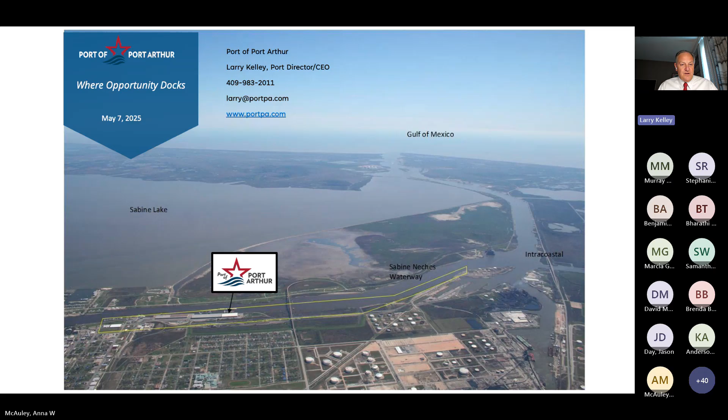So if you don't mind, next slide—that's probably enough of just seeing where we're at. Probably a few people on the call have been through Port Arthur, certainly known for the food and a number of athletes and entertainers that have come out of there. But just real quick, as a public port entity, we may be an odd bird on the call.

We all pursued a very similar grant program. We're a break bulk port. While we do handle some containers, our focus is largely cargo that is sized and fit and placed in a ship and removed. The commodities you see on the right—we handle eucalyptus pulp and other forms of pulp that go into making products you know and enjoy on your store shelves, like Viva, Charmin, Bounty, Cottonelle, Kleenex. Our waterway probably handles more of that fiber between ourselves and Port of Beaumont than any other region or waterway in the nation.

The waterway is also known for being the third highest tonnage on liquid energy exports and the like. Some of the other commodities we handle are aluminum, dimensional building products—2x4s, 2x12s and such. We figured we handled enough last year to build about 15,000 homes in Texas.

One of the things we're very proud of is we're one of 3 designated strategic seaports in Texas: Corpus Christi, Port of Beaumont, and ourselves. Combined with Port of Beaumont, they handle more than we do, but collectively we handle more military cargo than any other commercial ports or commercial waterways in the nation. So very happy to do that.

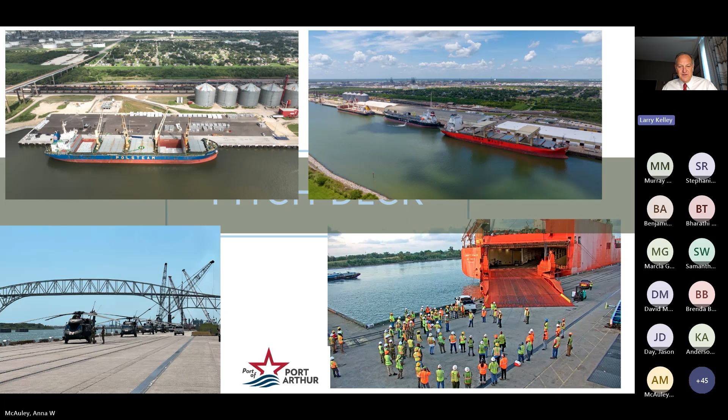Next slide, please. We have a pretty robust capital expansion plan. Berths 5 and 6 constitute most of it, well over $110 million in investment for a small town and a relatively small port—that's been a big project. We're out of marine construction for a little while; we're doing a lot of backlands development, laydown yards, and we do have a building replacement. A big component of why we're here is local job creation and economic development, which leads us to the grant application. In the work we do, we can put probably more people to work with a stabilized laydown area than I can with a building, which leads us to the next slide.

That was kind of an eye test. What brings us here today is the 2022 RAISE grant application. For those of you who have participated in the USDOT discretionary grant programs, I go back to submitting in the very first round, if it was 2008 or I think '09. We were sent back to the dugout—we were 0 for 9 before we got our first grant. That was in '18.

Not very successful. There's not a lot of quit in us, or I'm not smart enough to give up, but we applied through all the various programs.

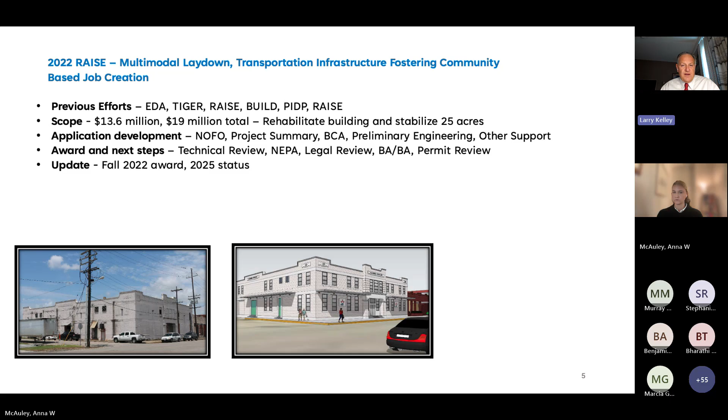We do have some concerns of increased cost of construction of what's happened since 22, but Anna, I will pause there if that's okay. All right.

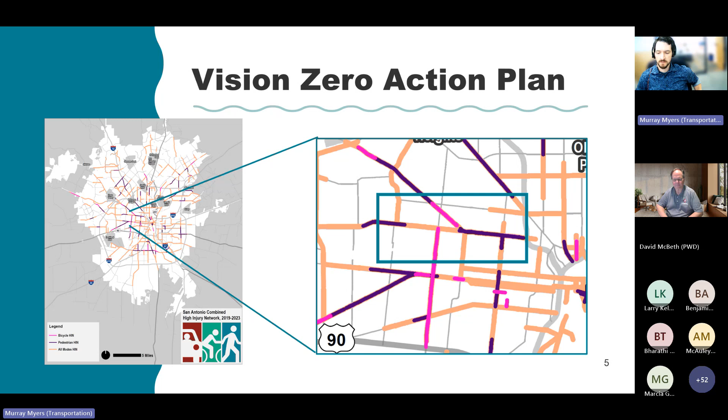And the orange-yellow is all modes, meaning it's dangerous for vehicles, motorcycles, pedestrians, and cyclists. In terms of our federal grant awards, David will talk more about the RAISE planning grant in a second. We were also awarded the Safe Streets for All grant for our Quick Builds program last year - identifying, demonstrating, and evaluating low-cost, high-impact safety countermeasures on the city's high injury network, with the goal of delivering these projects at one-fifth of the cost and one-seventh of the time.

That program includes identifying 5 pilots, implementing those pilots, monitoring them for 6 months, and then evaluating how we continue the program long term.

In 2022, we were awarded the Safe Streets for All grant for Zarzamora, which included 8 mid-block crosswalks, pedestrian hybrid beacons, refuge islands, and vegetation, along with safety campaigns for 10 of our high injury network corridors. So in each of these, you can see how the city has used data to drive each of our projects. We're a very data-driven organization in all that we do - not just in transportation, but also public works and across the organization in our 40+ departments.

So with that, I'll pass it to David.

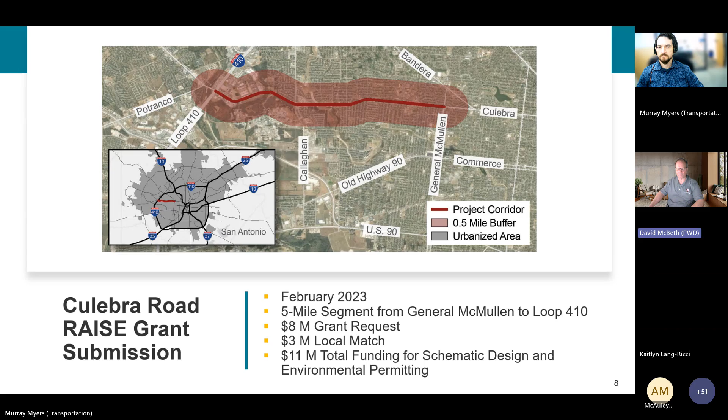So we put in an $8 million grant request, and we were going to match $3 million with that from our bond project - that was a 2022 bond for $11 million total funding for this. This was to do schematic design and environmental permitting for the entire corridor, which gives us positioning to go after future grants for design and construction.

And that shows the feds that we've made a real commitment to this corridor. We did the transportation study, we've got $15 million invested already, starting some improvements in the corridor. So we're very invested in the corridor with the current bond program. Next slide.

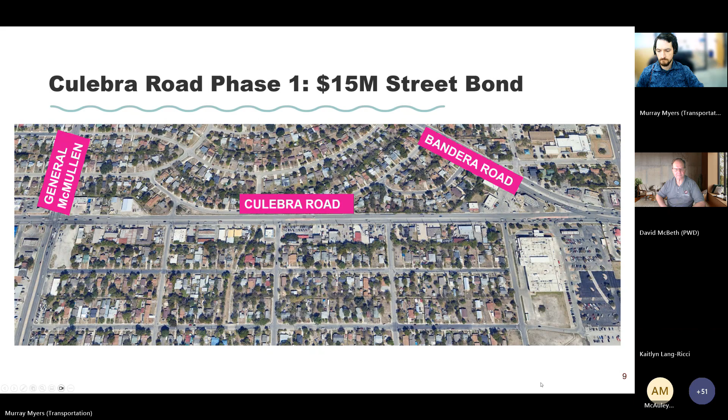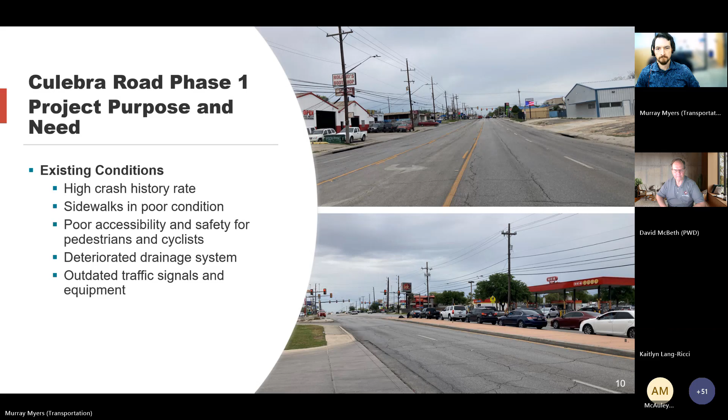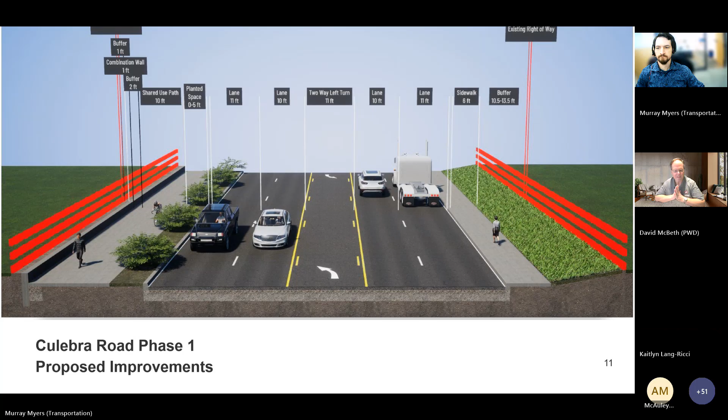So next slide. With the RAISE grant, how were we successful? Like I mentioned before, we had this previous transportation study, and that helped with project readiness. We had already engaged the public on it and gotten very good stakeholder engagement. We also invested in the 2022 bond program with that $18 million, 15 of which we used for a construction project, and $3 million we reserved for the local match when we applied for the grant.

We were able to successfully get a lot of project support from the stakeholders and partners engaged when we did that transportation study, so we had a lot of community support for the project. On the merit criteria, I think we scored really well when we submitted for the RAISE grant - again, the safety issue with high crash history, we were really aimed at reducing pedestrian, vehicular and bicycle crashes in the corridor, which are very high for San Antonio in this corridor.

Sustainability is always a merit criteria, and this provided an opportunity for us to do some sustainability work with landscaping, trees, and materials used for construction. Quality of life - again, just being able to improve expanded transportation access for an area that is low income, but also opportunities for economics for this historically disadvantaged area of the city.

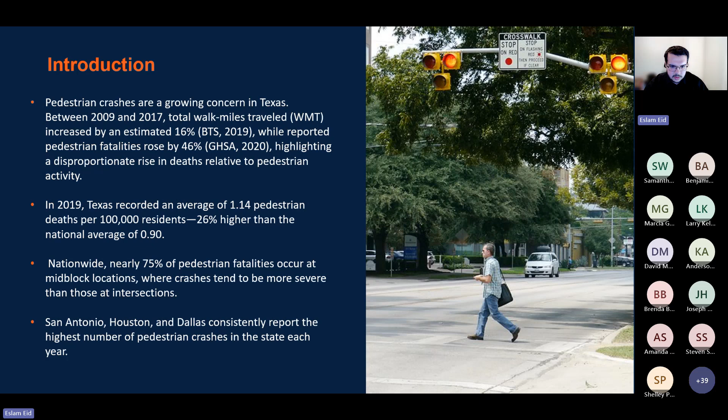In 2019, Texas recorded an average of 1.14 pedestrian deaths per 100,000 residents, which is 26% higher than the national average of 0.9. Nationwide, 75% of pedestrian fatalities occur at mid-block locations, and these crashes tend to be more severe because these are areas where pedestrians are not expected to be. San Antonio, Houston, and Dallas are our main focus, as they report the highest number of pedestrian crashes in the state every year.

There's a need to identify high-risk locations in San Antonio, Houston, and Dallas, and to start integrating interventions. There's also a need to improve understanding of promising crash mitigation treatments in Texas, and these high-risk mid-block crossings need to be evaluated based on detailed crossing characteristics. We want to see how pedestrians use the mid-block, where they're crossing to and from, and what interests them into taking that risk.

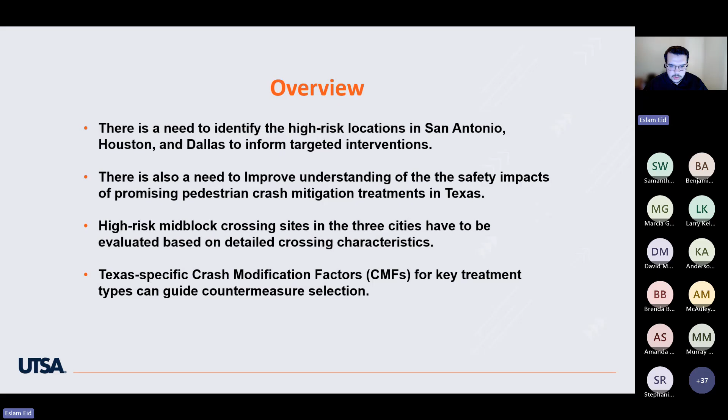Texas-specific crash modification factors are to be developed. That is our main goal, to develop CMFs specifically for Texas. We want to develop a system for TxDOT to help identify high-risk pedestrian mid-block crossings and select the most effective treatments for each location.

Our assessment methodology focused on crashes from 2003 to 2023 using crash data for Dallas, Houston, and San Antonio. We did GIS-based filtering to exclude crashes at intersections or intersection-related crashes, since there are multiple types and we're only interested in mid-block crashes. We look at each crash and create a 5-kilometer buffer zone around it, then examine overlap between crashes to find hotspots.

We also filtered the relevant roadways using TxDOT's roadway data map and inventory. For data processing, we found some crashes reported in places not close to the roadway, so we did some snapping to ensure all crashes are in the correct locations. Finally, we identified pedestrian crash hotspots and validated them using hexagon-based spatial analysis in ArcGIS.

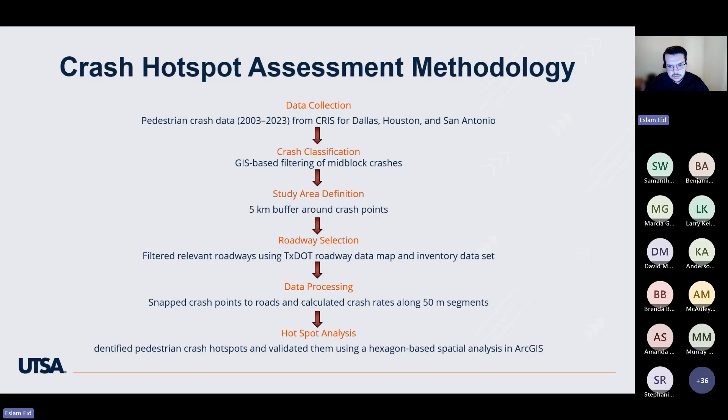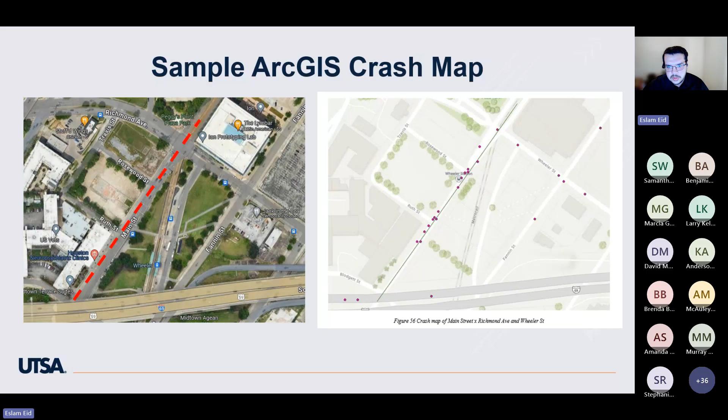Here's a sample ArcGIS crash map, showing one road in Houston—Main Street crossing Richmond Avenue. The purple dots represent pedestrian crashes along that line.

Some key crash data facts we obtained for our hotspots: we identified a total of 30 hotspots, the top 10 for each of the three cities. At 86% of all hotspots, there was a bus stop present, either on the near side, far side, or both. The highest crash days of the week were Fridays and Saturdays, with the top time ranges being afternoon and night. The most contributing factors were pedestrians failing to yield, and second, intoxicated pedestrians and intoxicated drivers.

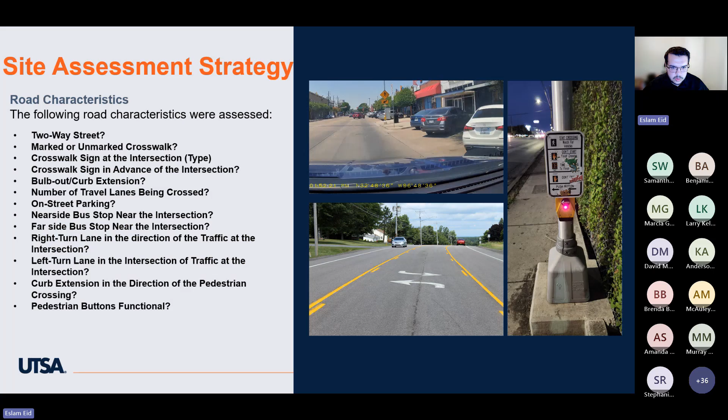Moving on to site assessment strategy, we're essentially asking what reasons would cause a pedestrian to cross at mid-block instead of at an intersection. We look at things like whether pedestrian buttons are functional at the intersection, whether a median encourages pedestrians to use it as a refuge even when not designated for that purpose, and whether there are bulb-outs, curb extensions, near-side or far-side bus stops, and turning lanes. We're also interested in illumination—whether it exists and is functional.

The land use, specific land use for these areas, and we look at things such as marking quality, road characteristics, if there's a vertical slope or horizontal slopes on the road, any vegetation that might be blocking the signages for the drivers.

We also look at the pedestrian and driver interactions, such as how many drivers drove through the crosswalk without attempting to yield. Do drivers generally yield to pedestrians? Does group size affect how drivers would yield to pedestrians? Are there physical disability persons crossing the street, which might give it more priority? Number of pedestrians attempting to cross the intersection.

We also looked at number of pedestrians that would use the intersection as opposed to jaywalking. And we also focused a lot on bus stop activity and usage, because we noticed that it is one of the main reasons why pedestrians would cross from one side to the other.

For our recording method, we simply used dash cams in our cars, and we posted up at these 30 locations for an hour to two hours at the highest crash durations, which were afternoon and night. We focused our study at these durations and recorded some footage.

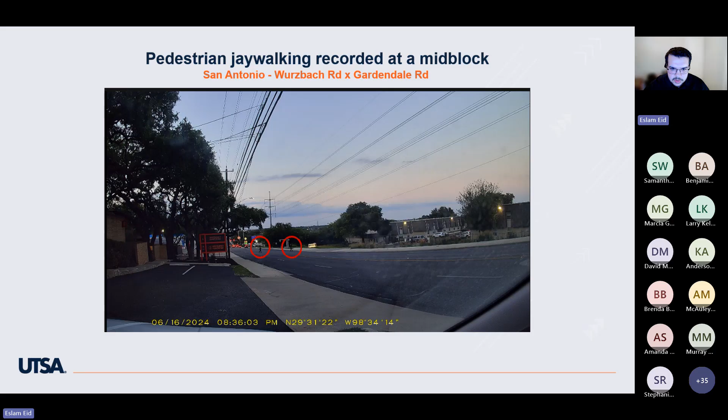And this road has a vertical slope as well, which could contribute to some crashes for pedestrians not being able to see the car, maybe at the top of the road. It can affect as well how long it takes the drivers to stop for the pedestrian.

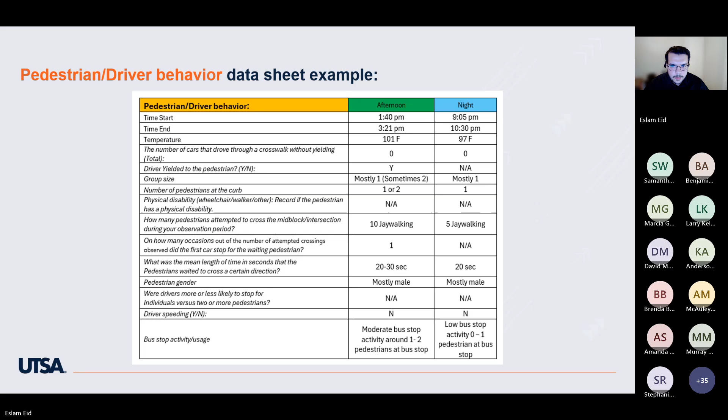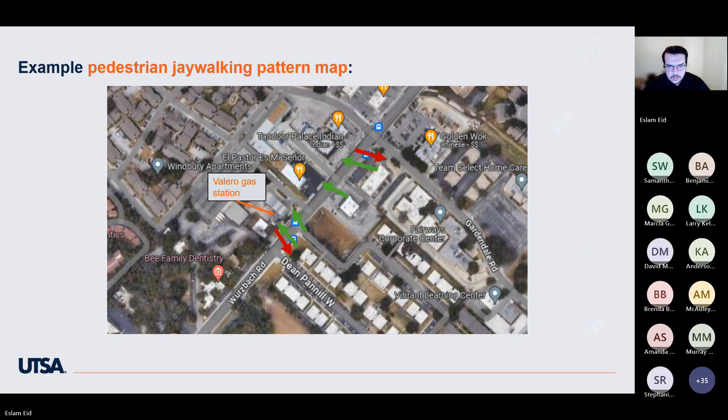And as well, down the road, we can see a lot of crossings occurred between the restaurants and the opposite side of the road.

Our observed pedestrian destinations: more than a third of all crossings in the 30 hotspots were to and from gas stations, usually due to multiple interests there, like food trucks and other activities. We saw a lot of activity to and from gas stations and residential areas, followed by shopping plazas at 6 out of 30 hotspot locations.

And then there's a tie between medical centers and HEB Plus slash HEB.

As a conclusion, jaywalking behavior is widespread. We've seen it mostly focused when there's a big distance between one intersection and the other, or it's inconveniently located. Pedestrians choose to take the shortest path to their destination, and often use medians or turning lanes as refuge, perceiving it as a safer alternative to shield themselves from oncoming traffic.

This behavior was most common near bus stops, commercial establishments, and gas stations.

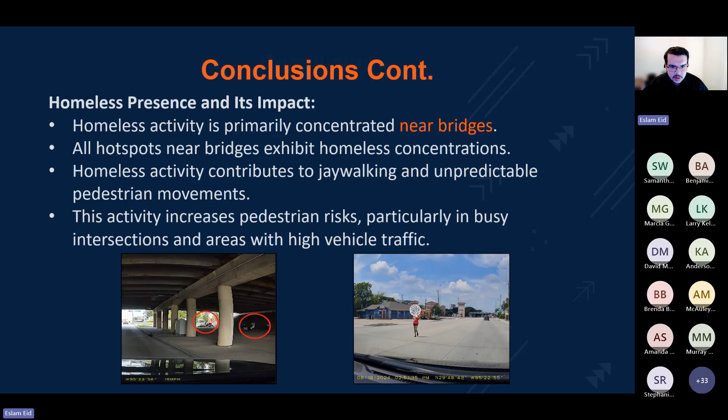Another thing we noted is high homeless activity, primarily concentrated near bridges, which can virtually increase pedestrian volume in these areas. Homeless activity contributes to jaywalking and unpredictable pedestrian movement, which increases pedestrian risks, particularly in busy intersections and areas with high vehicle traffic.

Drivers were seen frequently failing to yield to pedestrians, even at treated mid-blocks. But we also noted something interesting: in places where jaywalking is very prevalent and there's a high volume of pedestrian jaywalking, there's some sort of jaywalking culture, and drivers anticipate pedestrians crossing in these areas. In that case we saw a lot of people actually yielding to pedestrians crossing.

Most drivers are seen to comply with speed limits, but speeding was seen more prevalent at nighttime.

Poor lighting was a main concern as well. There's a lack of street lights in mid-block locations, as of course it's not expected for pedestrians to cross there. Low pedestrian activity at night in general, but there's still high activity between convenience stores, gas stations, and bus stops throughout the night.

To repeat again, most reported crash factors include pedestrian fail to yield, intoxication, and also failure to yield to pedestrians, which suggests that even at treated mid-blocks, there were some cases where the driver fails to yield to pedestrian as well. Other factors are driver inattention.

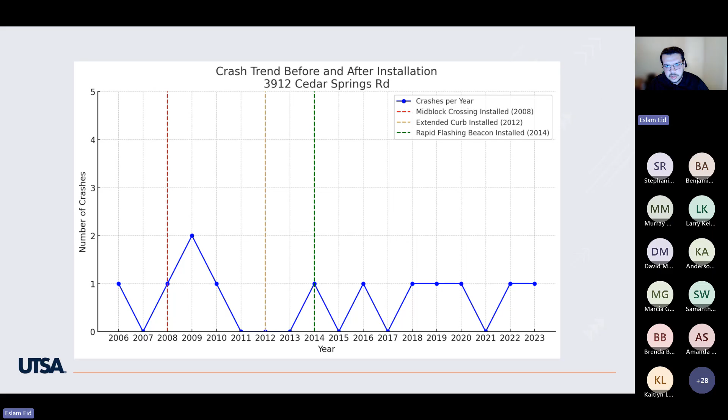At first glance, we can notice that it hasn't reduced crashes since 2014, but we suspect there is an increase in pedestrian volume in this area. It's a very lively area with a lot of bars, restaurants, and so on. Analytical data such as streetlight transportation analytics can help us determine if there was a high increase in pedestrian activity in this area over the years, indicating a positive effect from these mid-block crossing treatments.

So, as I mentioned, we would like to hear your opinion. I believe your input will matter a lot for us to determine our best countermeasures for Texas. We're going to post a small survey in the chat, and we would like to hear your opinion. We have multiple mitigation measures, and we want to see what professionals such as you perceive as the safest mitigation measures when installed alone and in combination. It would only take 5 minutes, and we would really appreciate your input. That is all from me. Thank you very much, and I'm open, me and Dr. Hatem, for your questions.